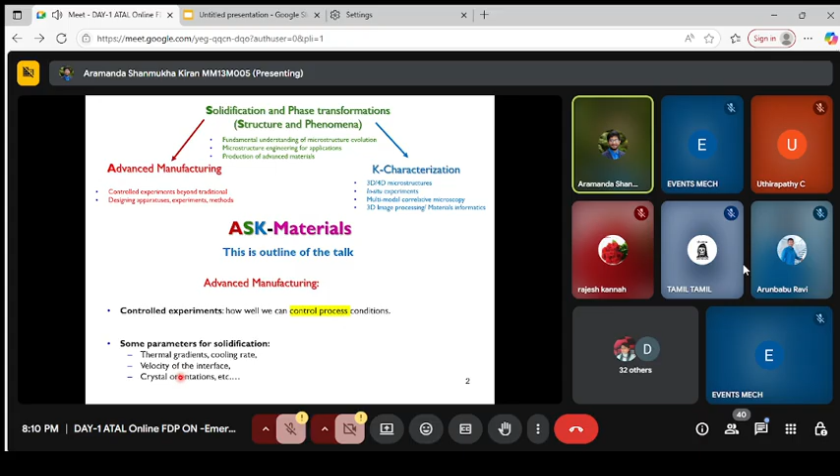So the material has some crystal structure. If you know FCC, BCC, those crystals have different orientations, like 111, 100, different planes, and that orientation will also affect the property. So these are some of the parameters that are important for the manufacturing of advanced materials.

So then what is the actual challenge in doing these controlled processes? I'm showing one schematic, assuming this is a liquid and this is solid. When you are cooling this, the liquid is transforming into solid, and if you are cooling from one side to the other side, the solid is propagating like this.

So when this is propagating like this, there is a problem. The thing is, if you want to mathematically solve how this is evolving, you have to balance the energy at the flux of the heat at the boundary. Then it is nothing but the heat flux in the solid and the heat flux in the liquid. If we have balance, that leads to how much heat is generated at the solid-liquid interface.

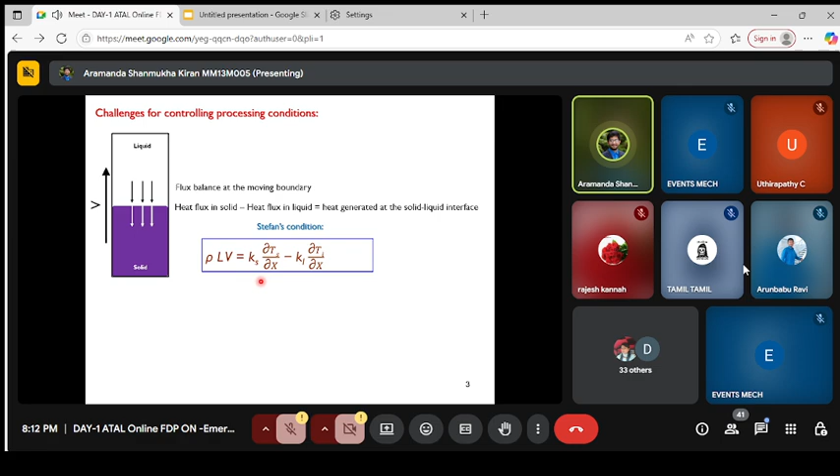People call this the Stefan condition, where this is the amount of heat released at the solid-liquid interface, this is the heat flux in the solid, and this is the heat flux in the liquid. But the flux equation already has a thermal gradient here. This is how temperature is changing with distance, and this is the velocity.

So if you have an equation with these two parameters in the same equation, that means both are actually coupled to each other. If they are coupled, you cannot change this without changing this. As per the last slide, we can do better advanced processes only if we can control this and this independent of each other. So how well we can do that is the important question.

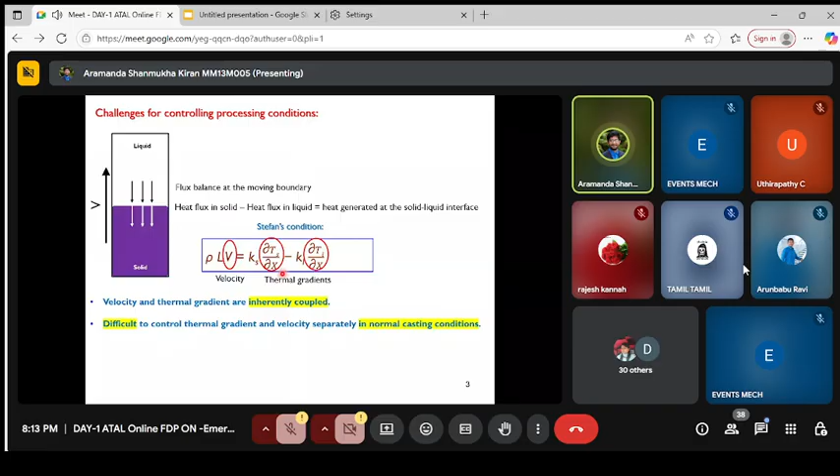In normal casting, you cannot control both of them separately. Both are dependent on each other. When you are cooling, you have continuous release of latent heat with a velocity, and also we have a different thermal gradient. So doing solidification with normal casting is easy, but we want precise control. How can we do the precise control?

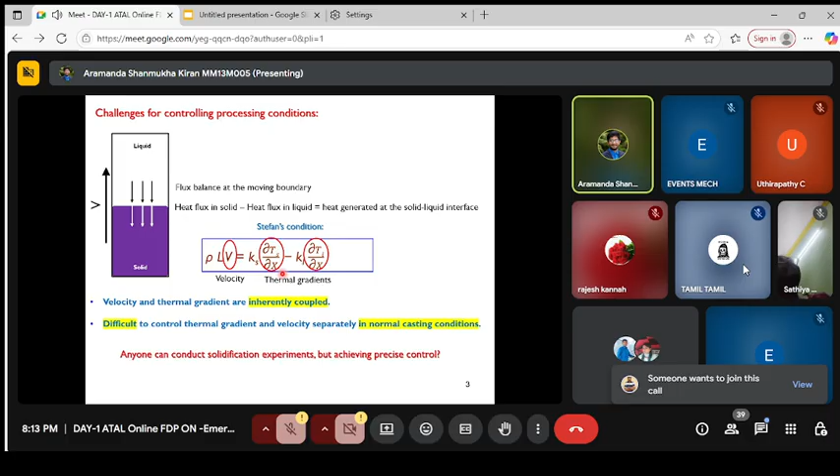But before we go into precise control, what is the advantage of the structures that we can get with good control? For that, I want to show some images taken from the microscope of a material, inside a material, with different velocity or different cooling conditions. If we are doing slow liquid to solid transformation or fast, how will it affect the transformation? Don't confuse with this.

I will skip that. For example, I'm taking a material which is tin, and I have added up to some 4% of zinc. This is this composition. This is something called a phase diagram, and how the alloy melts with each composition of zinc is given by this phase diagram. So pure tin melts at 232, whereas 4% zinc will melt along this line. If you don't know this, that is fine.

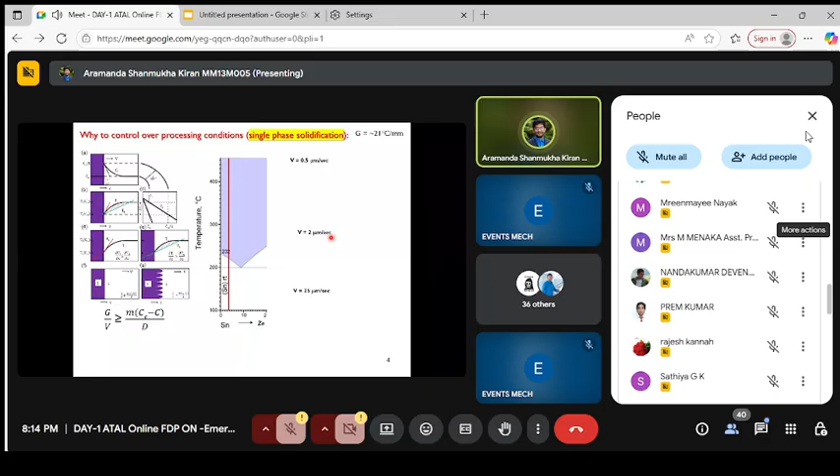But what I want to say is this alloy is taken with 4% of zinc in tin, and it is cooled at a very slow rate, like 0.5 micrometer per second, a little faster at 2 micrometer per second, and very fast at 25 micrometer per second, with a gradient of 21 Celsius per millimeter. In the first case, in the microscope, we see a single full block like this, shown schematically, where from the liquid the single phase is coming this way.

But when it is cooled with very high speed, the microstructure in the microscope shows something like this yellow thing, which is cut in the cross section. That's why it looks like this. These are all cross section images where you can see so many circular features here. And by increasing further, we can see a dendrite type structure with a completely periodic structure.

So what it implies is the same alloy, same material, with a different process condition, the interior of the material is changed. That means by changing how you are cooling, you can change your material. That will change the property. That will change the entire material application. So how you cool is more important, and how you get the internal structure is very important. This is one example.

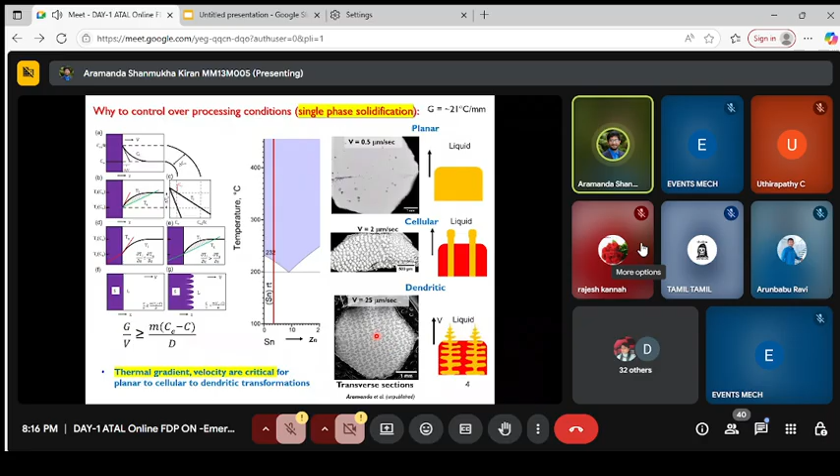So here, that is the point: thermal gradient and velocity are important. This is called planar, this is like cellular, and this is like dendritic. For this transformation, these conditions are very important. There is another thing called eutectic solidification. Eutectic solidification means from one liquid, two types of materials will form inside the solid.

When we see in the microscope, we can see tin. Also, we can see zinc. There are two elements. They are separately formed inside the material. That is possible with this red line of composition, around 10% zinc and 90% tin. And if we cool it slowly, we can get one type of structure.

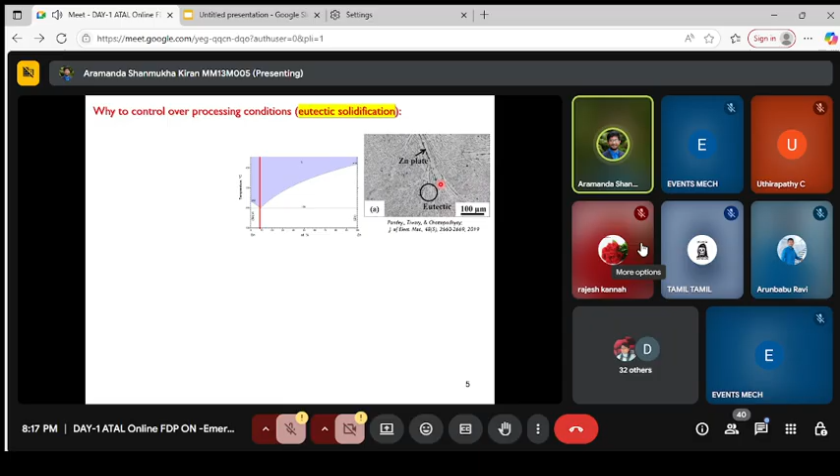So all this white color is the tin, the black things are the zinc. In the microscope, we can see two types of features, one tin, one zinc, with a very random arrangement of zinc.

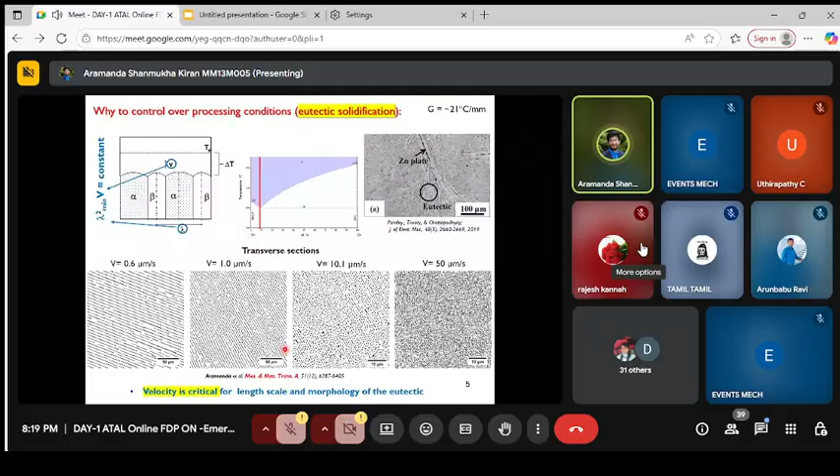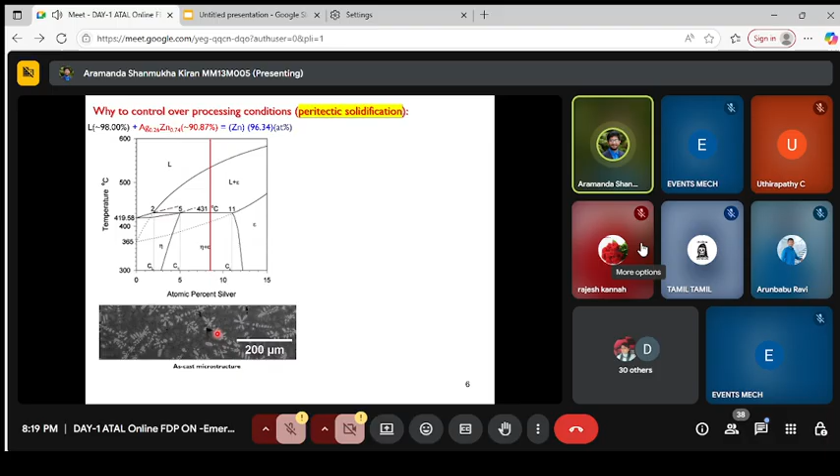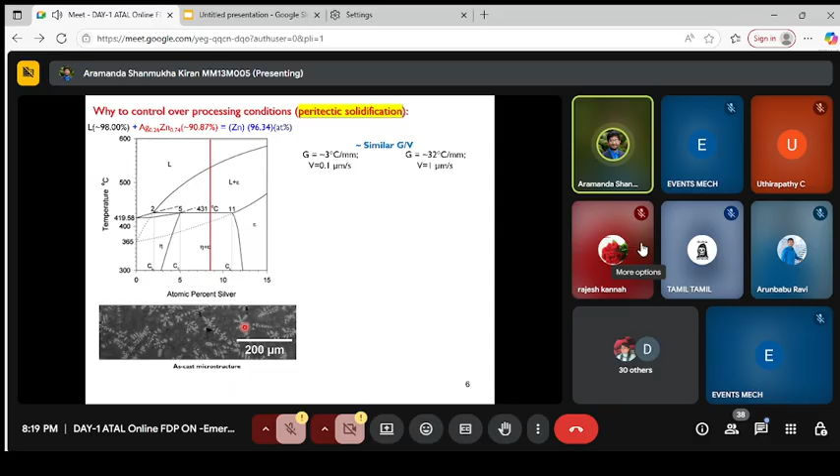So this is another type of cooling. This is actually when we do as cast, like just pour this composition of silver zinc in a mold. You see some of the structure like this. But if we do a controlled experiment, the structures you see will be completely different. So for that, I will show two different conditions. In the two conditions, the structure inside the material: this white thing I will be showing as red color, and the black thing I will show as blue color.

So you see here, this is the material. In this material, this becomes like a single band type structure. Here I am showing it in 3D, so don't get confused with the 2D image. This 3D image is obtained by doing something called CT scan, which we generally do for our body and so on. So here you can see a different type of structure. The overall point is that in another type of material also we can get a different type of structure with different cooling conditions.

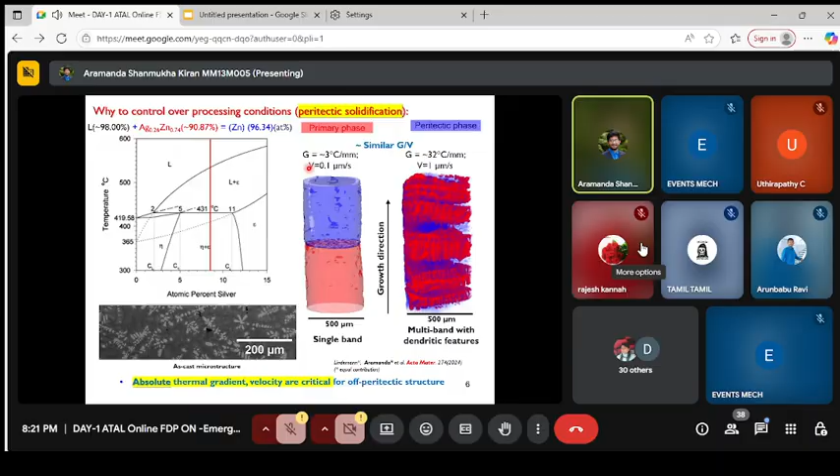So here, if we see G by V here and G by V here, they are almost similar, but we see different structure. G means the thermal gradient, V is the velocity. So gradient by velocity is not the only important factor. Each value of G and V is also important. So this condition should also be controlled so that we can get better microstructure, maybe even better than what I am showing.

Finally, one more place: if you want to add particles into the material, in a liquid you are putting particles and you want to keep them inside the material, there are options like this. When solid is growing into the liquid, when you are solidifying, the solid can push the particle, or the particle gets engulfed, meaning it gets trapped inside the material, or it can form this structure. So many possibilities are there. All by controlling the condition, you can get whatever you want, and that can lead to good properties of the material. So similarly, the solid liquid interface can be flat, as I was showing.

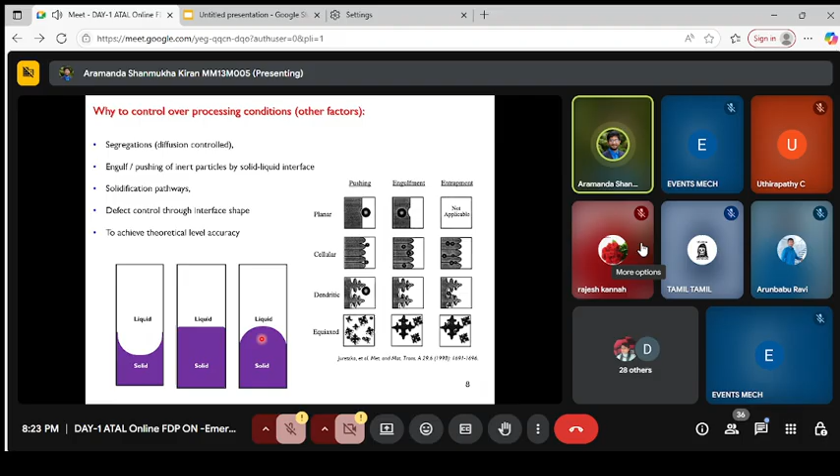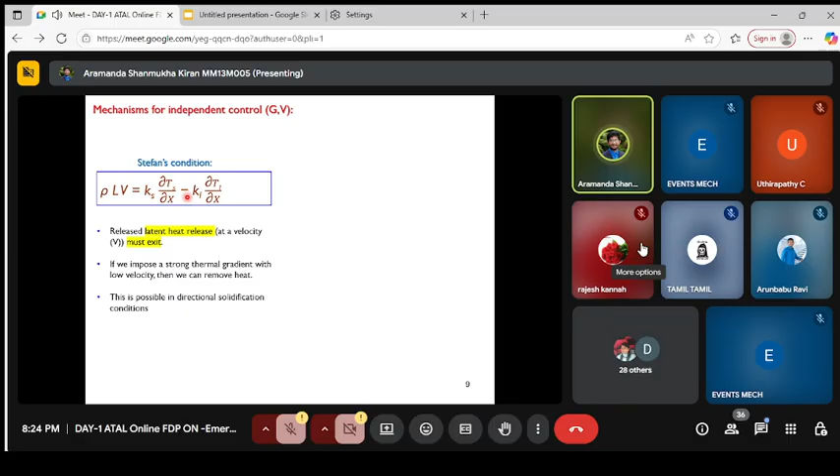So with this, how we can control the process condition is important, and that is what we are going to see now. As we are seeing, this is a condition where the velocity and this are coupled. This can be decoupled by doing something called directional solidification. This is the main discussion of the talk, and I will take time to explain what is happening here.

So there will be two zones. This is the hot zone, where you keep a crucible with full metal inside, and you have something called the cold zone. Here the condition is cold, here it is hot. When you put your material inside a crucible and put it in this zone, all the solid will melt, and we set the temperature above the melting point of that material. Suppose it is aluminum, we will set it above the melting point of aluminum. Then every solid gets melted.

The metal becomes a liquid here in this stage, and you can bring this down slowly. When you bring this down slowly, you can see something like this. Initially this is completely liquid. After bringing it down, it solidifies like this in black color, and there is something called the solid-liquid interface as shown here. So the rate at which you bring it down sets the velocity of the solid-liquid interface, and the temperature difference between here and here gives the thermal gradient. By controlling these two temperatures, we can control the thermal gradient. The rate at which you pull down controls the velocity.

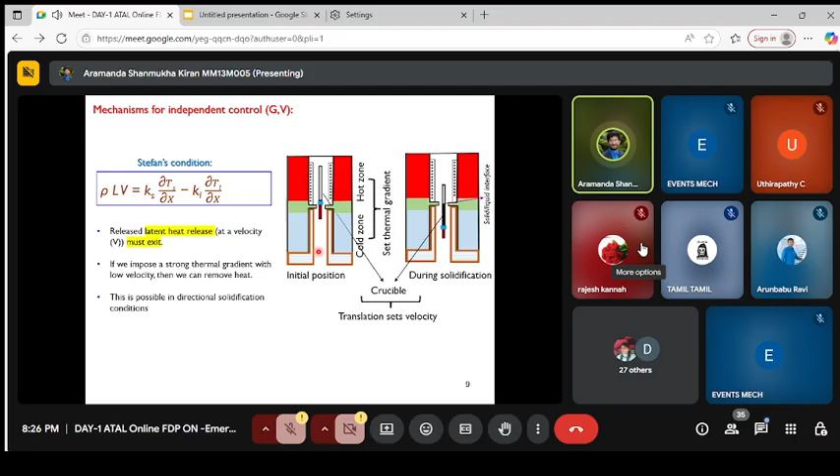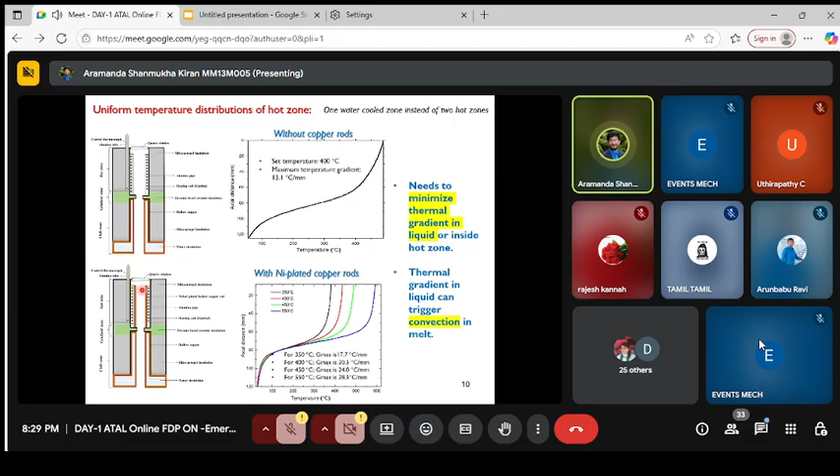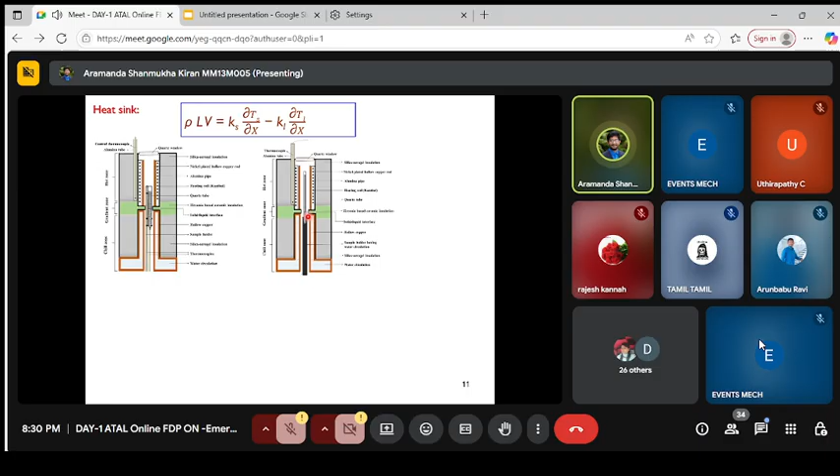So again, another way to further improve the directional solidification technology is, as we see here, we are keeping the sample like that with a wire or with a rod. And the second way is to keep it within a holder, where you can insert the rod. Now in the second case, we can also supply water to the black body, the black region that I am showing, which is the sample holder. What happens with that is it has extra heat absorbing, or maintains constant temperature at the bottom.

So this is something like what we designed to keep the sample inside. This is from the top view. You can put a sample here, and water goes into this, it gets continuously cooled, and then water goes out. So this way we can design from one thing which has no water cooling to something with water cooling. With water cooling, the advantage is we can take out most heat from the sample, because from the top zone the molten liquid is giving a lot of heat to the sample, and that can be extracted out through the supply of water.

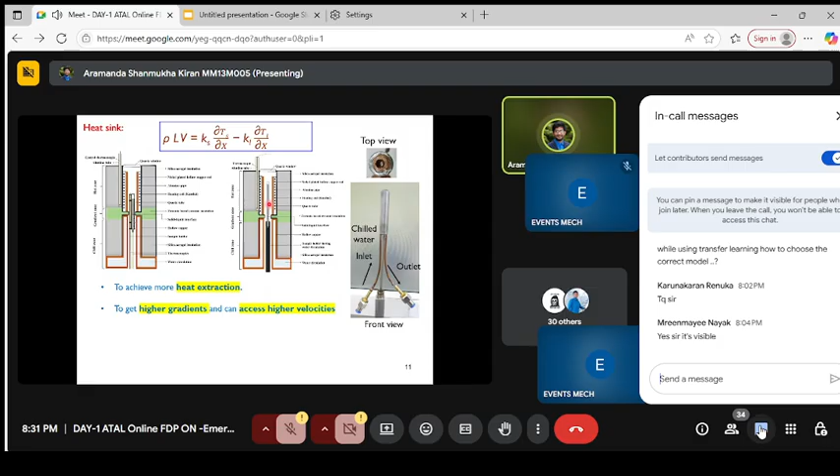And this leads to more process variables, like you can increase to a higher gradient, and with a higher gradient we can also use higher velocities. So we can have more types of processing conditions, which leads to more process-derived microstructures, or the structure inside the material. So this is another way.

The other way is, instead of using this, we can use some liquid metal or even water directly, and all the material will go into that. Then the heat equation consists of one more term. Forget about that. But what I want to say is you can put the entire crucible into a melt of liquid or some water. That is additional cooling that leads to much more different types of processing conditions. So these are different process conditions that generate the different microstructures I was showing before.

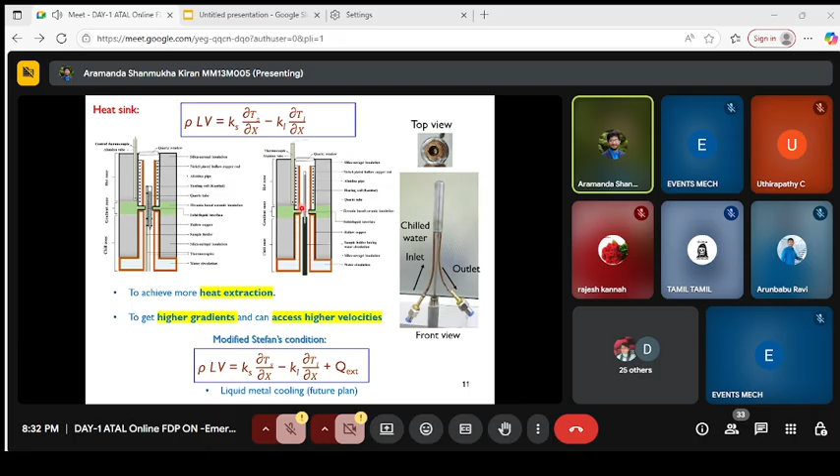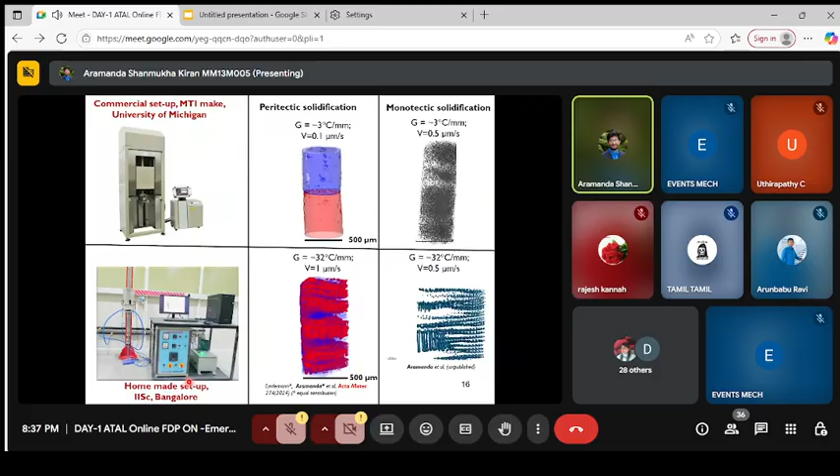So after my PhD was done, we had developed some other material. So here we are solidifying something called CMSX superalloy. This is a very high temperature alloy. This alloy is used as a turbine blade in aerospace applications, something like in an aeroplane. Some very high temperature is exposed to some blades when the fuel is running. So for that material, this alloy is generally used.

So this alloy we try to solidify, and we try to get a nice microstructure. We can see some microstructure or the structure inside that. So we try to obtain better properties of that, and that is all possible just because this furnace setup is also designed and developed by us. Similarly, some refractory elements are also made, and it leads to this kind of microstructure, the structure that you see. So the takeaway is that we should make better furnaces, and then it leads to good material development.

So some other ways we are trying, or we tried, is making the growth of material like in a spiral. You can see the spiral. So here initially all the material is filled inside, and that is melted and then started solidifying from one side to the other side. Here it will go directional. Once it reaches this part, it will solidify like this. And when we cut and see that material under a microscope, you can see some of the structure also forms like that spiral. The structure also follows like that.

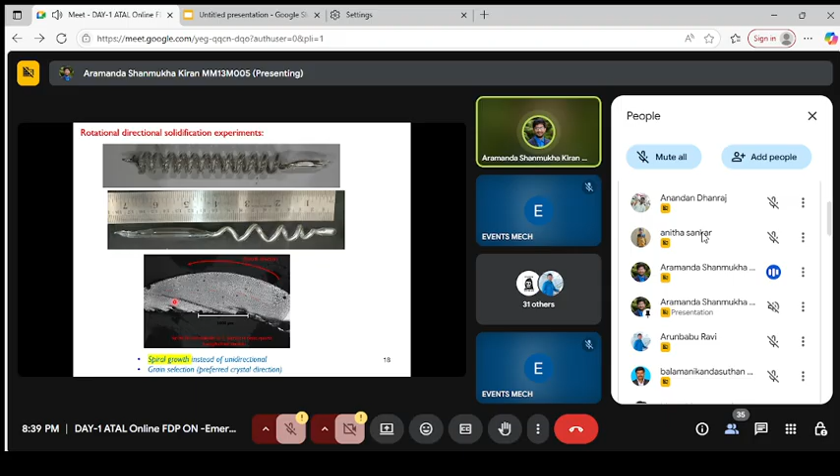So the motivation is that if you want to make some different structure inside a material, you can adopt this kind of technology and make some internal structure with a different type of visualization. So that means the same alloy or same material, you can generate in multiple ways, variants of the same material. The internal structure is different. Similarly, in another case, we have done bending the material when it is solidifying. I'm not going so much into it, but here also we see some bending happening from the straight part. So that is something very interesting.

Similarly, I was showing some different velocities. Here we did some experiment going from one velocity to another velocity, 32 to 0.5. While it is growing, we change it. So then the microstructure also changes with time. You can see very fine features here. As it grows, it becomes a very coarse feature. Similarly, we did the opposite. Here it is not gradual, it is a sharp change suddenly happening, and you can see very coarse structure to very fine structure.

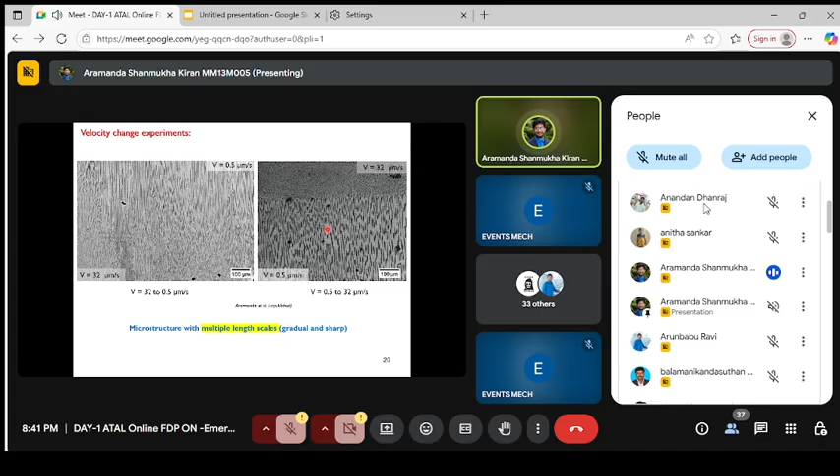Again, both are the same material, but it leads to different types of microstructure, sharp, continuous, everything. So what I'm telling again and again is the microstructure, or the structure inside the material, can be tuned with the process we are employing. So how well we control the process will control the structure we see, and that is very important. Again and again I was saying the same point. Till now I was discussing how we can control the process condition.

Now I will explain one more topic of eutectic solidification, where one liquid forms into two solids, and how that structure can be useful in developing a new material. So binary means only two elements are there. Eutectic solidification means when you are cooling the liquid, it forms two solids.

In the previous case, I was showing tin and zinc. In some other cases, it can be silver, copper. In some other cases, some two different things. Again, I can give an analogy: if you have salt and water, when they are mixed in the liquid state, both salt and water will dissolve in each other, and you have a single solution of salt water. But when you cool it to solid ice, do you think it will form as ice and salt crystal, or a single phase of ice?

So that is very interesting. In some cases, with some salts, the ice gets split and the salt gets split. When they are in the liquid state, they are all the same phase, but when they are cooled down, they become two different solids. So similarly, in that type of material, if you are cooling a liquid, it forms into two solids.

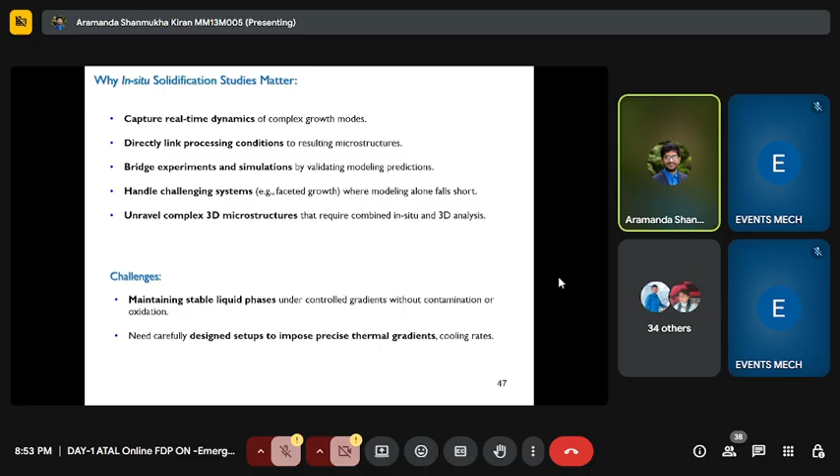So when there is some challenging system, like I was showing different microstructure, they all can be seen if they are difficult to model or if they are difficult to make in the artificial way. So these are the importances of why in situ solidification is required. And now the challenge is when you want to capture that in the real time, liquid phase will undergo different things like contamination or oxidation, because we are heating to high temperature that can react. So many problems are there, but need to design the setup properly, and if we design, it will work better.